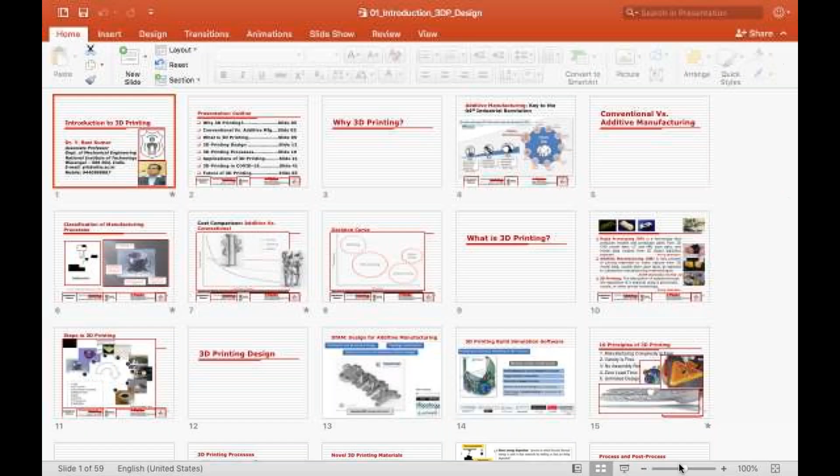Good afternoon, friends. So this talk is basically the introduction part of 3D printing.

What I have planned during this talk: why 3D printing, conventional versus additive manufacturing. The previous speaker has already thrown a good amount of light on conventional versus additive manufacturing, so I want to be as crisp as possible in that content. And what is 3D printing? 3D printing design - design is the main thing, like design for additive manufacturing is going to be the key in 3D printing. So I'm going to cover a glimpse of that.

Design for 3D printing, and 3D printing processes - we are going to have a separate session, so just a glimpse of 3D printing processes here. And of course, applications of 3D printing in general and specific to COVID-19, and finally the future direction of 3D printing. This is what I've planned for this session.

So then, why 3D printing? 3D printing is definitely a key element in Industry 4.0. Just as a recap: the first industrial revolution was way back in the 1780s to 1860s. That was basically mechanization - the first industrial revolution, where human muscle power was replaced with steam or water energy. That was Industry 1.0.

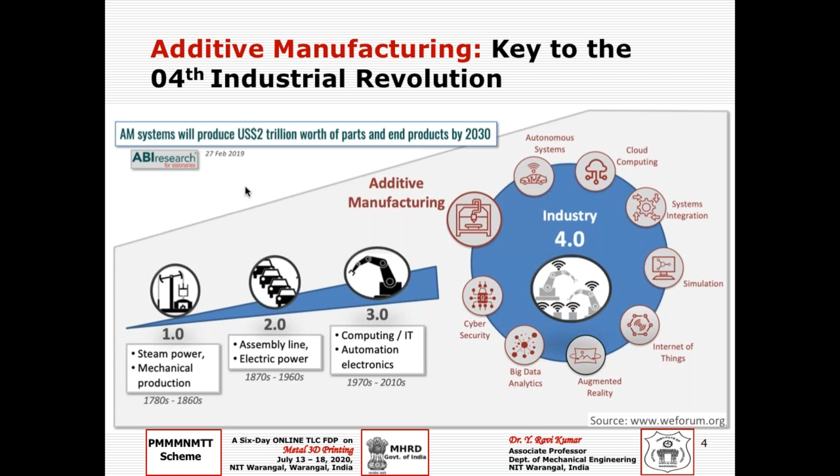So then let me give a brief classification. As we know, there are a lot of difficulties in subtractive manufacturing, especially when the complexity is more. If it is a simple component like this, you don't find much difference between additive and subtractive. More or less, the concern in subtractive is the scrap, the tool, and the jig or fixture.

But if you increase the complexity to a component like this cup, and you want to machine it, you have to consider several constraints. It's not that easy to machine this kind of component unless you have plans, tools, jigs or fixtures, and consider the number of axes the CNC machine has, and what kind of tool compensation radius is needed. A lot of things need to be searched, planned, and developed, and it will take a long way to do.

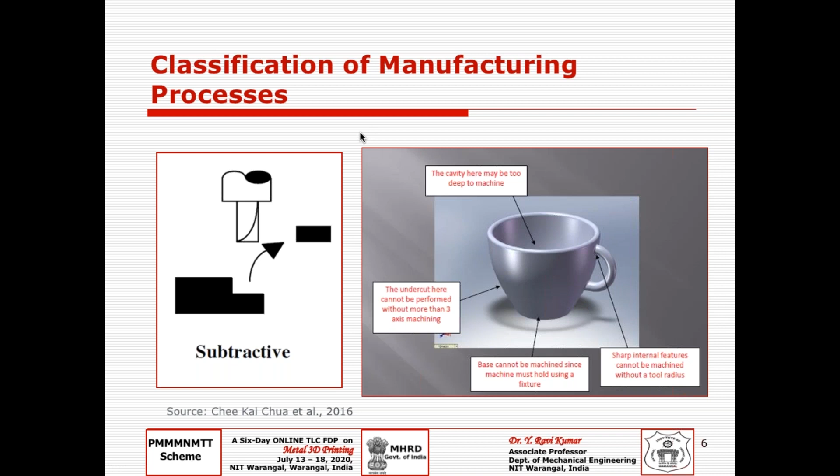But what 3D printing, or additive manufacturing, is going to offer is simplifying your life.

So no tool, no jig, no fixture, nothing. It is adding the material as per the demand. So that is the biggest advantage.

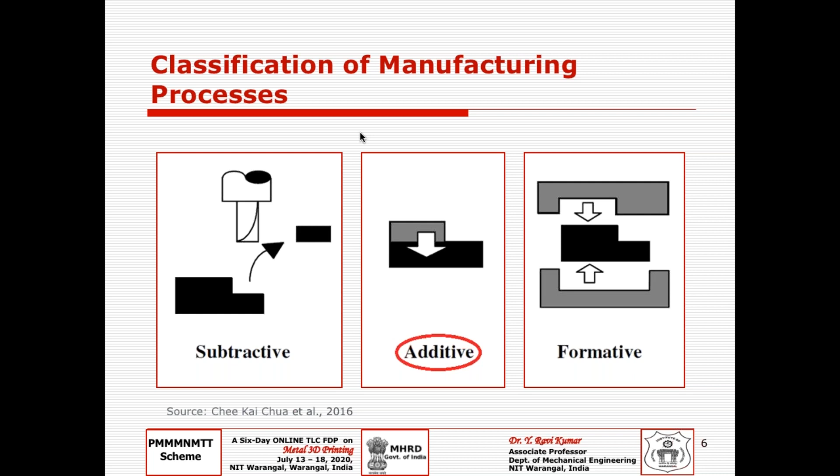Of course, we can compare it with other manufacturing or fabrication processes like formative, where we need to make a die for the anticipated shape. But here the biggest concern is how to make a die, how to design a die, how to fabricate a die, and again you have to look for subtractive manufacturing processes.

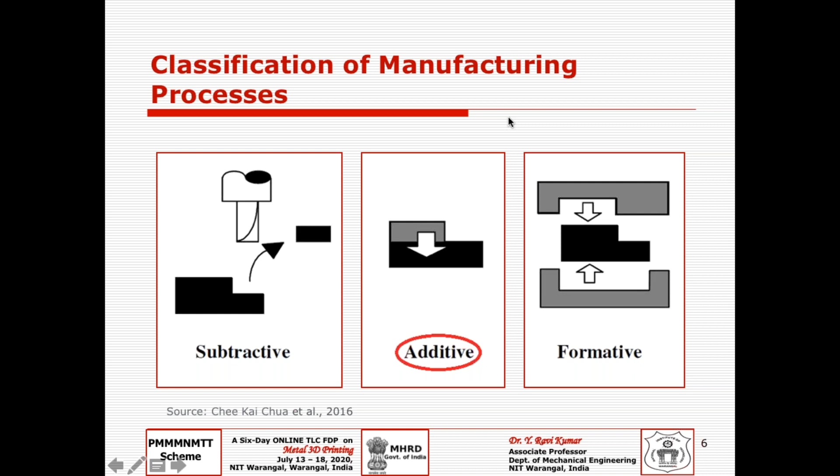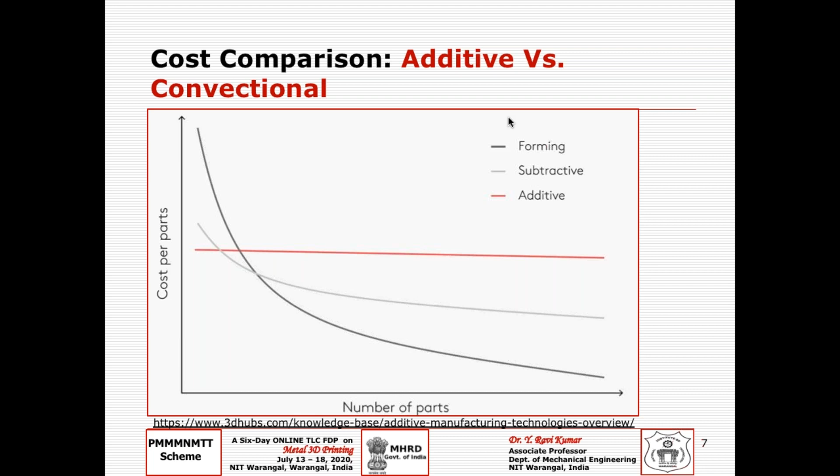And if the complexity is more, that is where additive manufacturing plays a vital role. And of course, the earlier speaker has touched on the cost comparison between additive and conventional manufacturing processes.

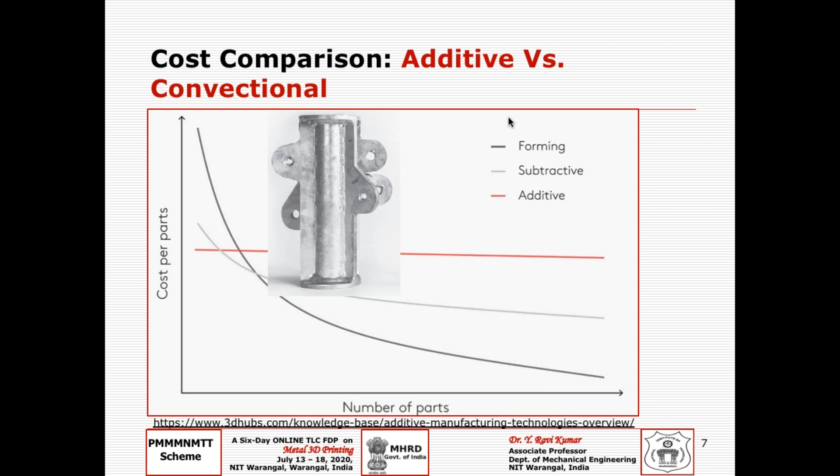So my central point here is complexity. Say if you have a component like this, it's very simple. If it's a CNC machine or a die tool making industry, they can make it very easily. But my design got changed.

My design is now organically designed, inspired from nature. Why? Because it's not a conventional cylinder or a conventional circle or elliptical shape, it has derived from nature, or it is organically designed.

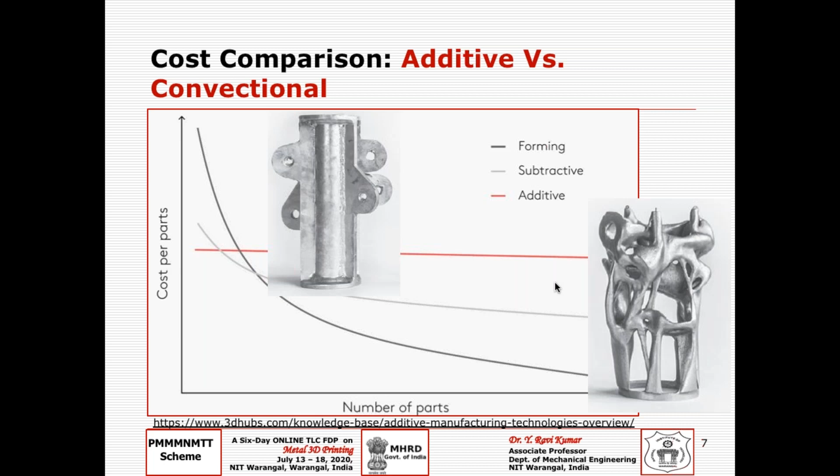So then what about the conventional manufacturing process, where will it go if this is the kind of design? This is where we need to focus, where the beauty of additive manufacturing or 3D printing comes into picture, as these kinds of designs are the breaking point or the beauty of 3D printing.

So if you see this plot between complexity and quantity, this is the extension of the previous slide. If your product complexity is very high and you're looking for relatively less quantity, definitely 3D printing fabrication technique is the best choice for you.

But if your design complexity is medium and you're looking for medium quantity, definitely CNC is the best option to choose. And if your complexity is very low and quantity is very high, definitely investment casting is the right choice for your application.

And if your complexity is medium but your quantity is high, better go with injection molding. So this is where you can take some decision on which process you want to adopt.

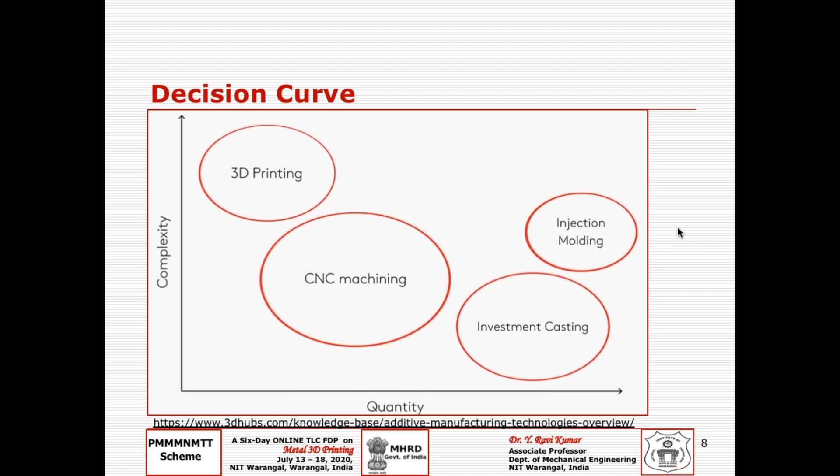So then what is 3D printing? Of course, nowadays it is not a new word to anybody, because it's simply the extension of 2D printing. We are living in a third generation of printing, we can put it that way.

Why? Because the journey started with prototyping, called rapid prototyping. Now slowly it has attracted manufacturers' attention - that's what we're talking about, additive manufacturing or 3D printing. It is an extension of two-dimensional printing. You name any term, but all these are synonyms.

So the kind of developments that have happened from the application of prototyping to manufacturing, or even mass production, people are looking at that now. And as we know, the technology's input is a digital model.

So either you derive it through a CAD modeling package, or from medical image processing software, or with CT MRI scan data, or even 3D digitizing systems or 3D scanning systems. Use any one of these interfaces to get the CAD model or digital model, and you're going to fabricate, or replicate the digital into physical form - that will be 3D printing, or additive manufacturing, whatever you call it.

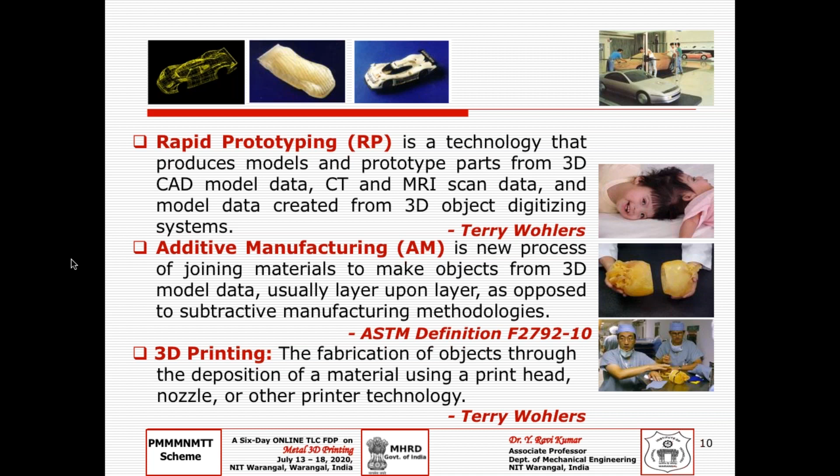Maybe rapid prototyping, but prototyping has exceeded the application maturity of this technology. Now it has elevated to manufacturing or tooling level.

So this is a fundamental slide - the various steps that are there in a 3D printing process. We have to start with the CAD model, or digitized data, or some means - you have to bring a digital model.

So what is your application? The major point we need to think about here is: you tell me your application, then I will tell you the material. Then accordingly we have to have a design for additive manufacturing, or design for 3D printing.

So it is not a conventional way of thinking. We need to change the mindset before we get into 3D printing. If we are using the same traditional mindset, you cannot exploit the power of 3D printing.

So your application is to have a cup of coffee. Go to any CAD modeling software. Nowadays CAD modeling softwares are open source, cloud based, or browser based, so you have a lot of developments. We don't need a big RAM or big setup anymore. Even a browser based software is available, which you'll practice in some lab sessions. Getting a digital model is as easy as that.

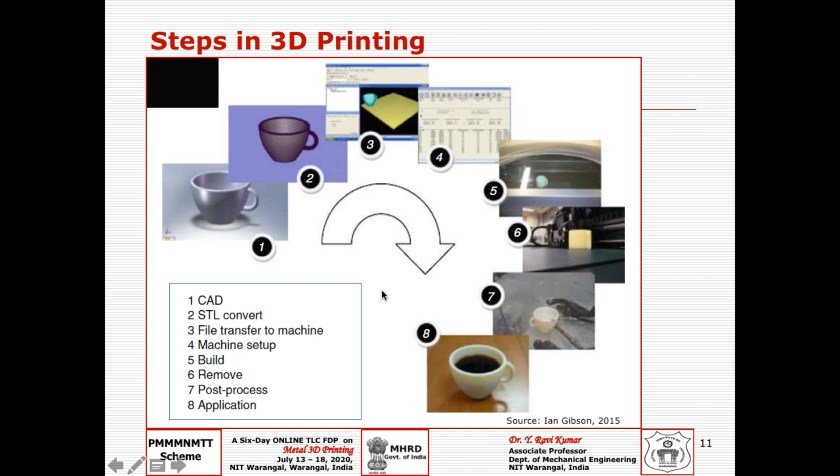So of course we will be talking about design. Why do we want to talk about design in 3D printing? Why is this word 'design' so important here? Why can't it just be conventional design? Is it not? That's what I am asking.

You have to change your mindset once you come to the 3D printing route. Why? Because with your traditional mindset, take this part for example - for traditional design, you have to start with a block of material. So your mindset is always about how to remove material from the block - the hole, the surface, or the curvature. But 3D printing is not that way. If your mindset stays in that way, you cannot judge your application or your 3D printing capability.

So then what kind of design, what kind of design content, or what kind of design should be in your mind once you come to the 3D printing route? We need to have a typical design thinking. Of course, we have a lot of design methodologies nowadays available with any CAD/CAM systems.

Maybe it started with parametric modeling. Now generative design is playing a vital role, and of course topology optimization - nowadays we use this word often. Why? Because you have such power. So modeling is not your goal; the goal is to print.

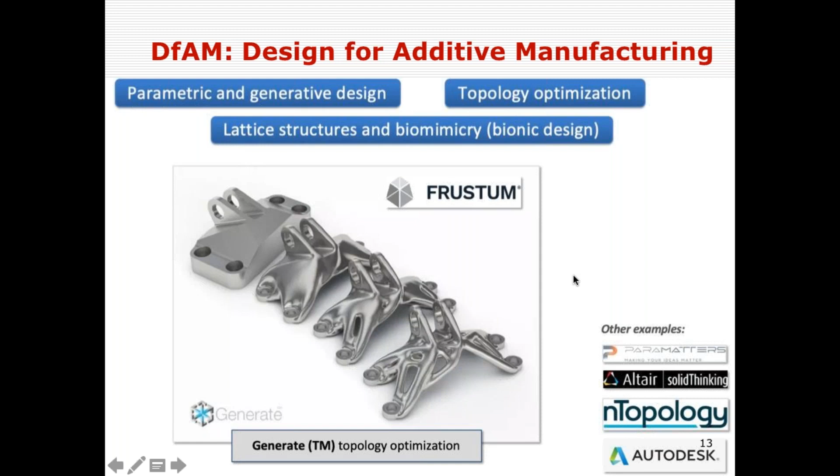So as Dilip, my earlier speaker, has rightly put, the simulation part of it - the 3DXpert is one which we have at NIT Warangal, and we are going to have a demo by 3D Systems on this 3DXpert software. So basically the idea here is to simulate before you manufacture.

Definitely it is not a new thing for CNC practice. You have been doing path verification simulations - for is any tool retracting, or is there tool collision with the workpiece. We used to do a lot of simulation in CNC. A similar thing we can do for 3D printing.

Of course, the material for 3D printing - if it is a polymer, you never care, because per kg it may be 1000 rupees or hardly 1200 rupees if it's a plastic like PLA or ABS. But if it is a metal like titanium, Inconel, aluminum, cobalt chrome, or other materials, those are very costly. So definitely we need to check for build failures or residual stresses.

But anyway, I have less time to talk here, so maybe you are going to have a live session on the 3DXpert demo by Lokesh. We can explore practically, on the screen, how supports can be simulated, how residual stresses can be minimized, and how we can compensate for all this. So you have not only 3DXpert, but other software too, and you can do all these simulations.

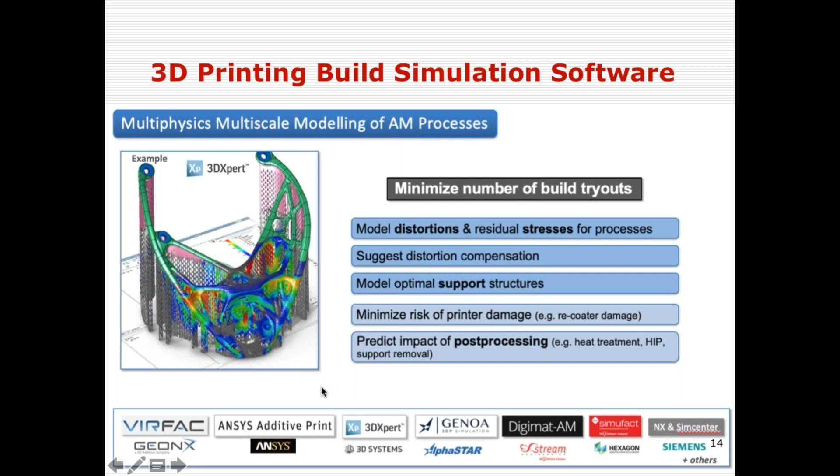And of course, I am going to put it in a wonderful way - the 10 mantras of 3D printing, or rather how it differs from traditional manufacturing practice. That is the intention of this slide - the 10 mantras of 3D printing. So the first mantra: of course, manufacturing complexity is free.

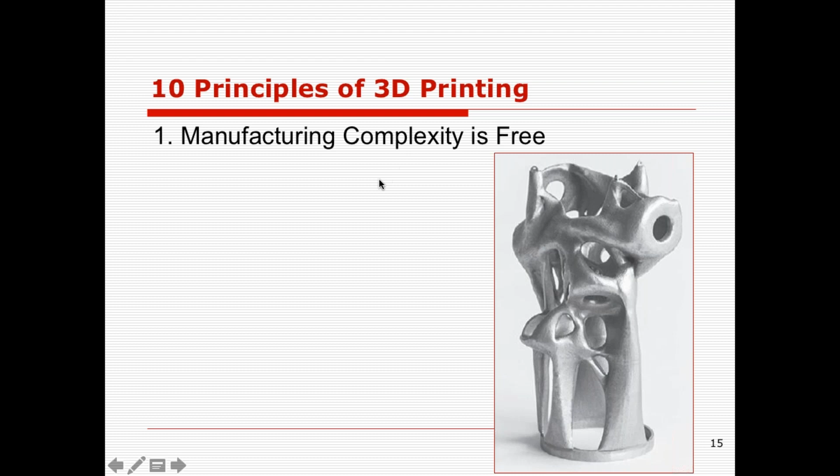For example, if you have a cylinder or similar, you don't find much difficulty or much effort in terms of number of steps or cost in case of 3D printing, in contrast with traditional machining or tool-making practice. So the manufacturing complexity you get is free of cost.

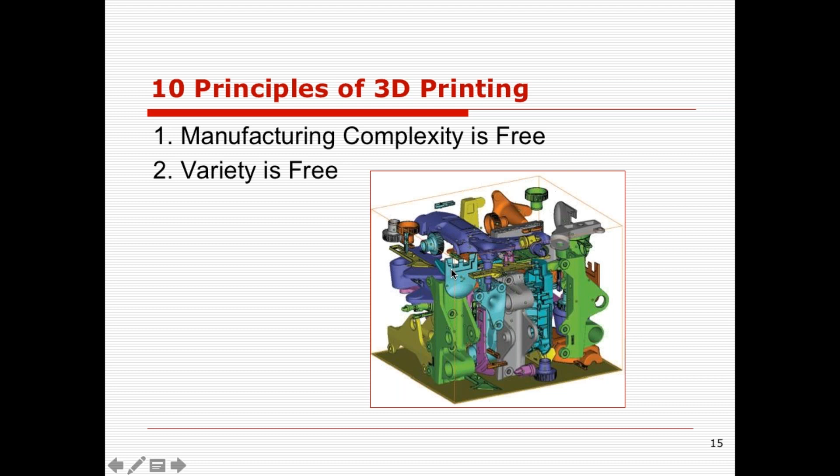Another one is variety is free. What do I mean by variety is free? I can make different geometries, different dimensions, different forms, all together in a single go. Otherwise, I should have planned tools for each component and designed jigs or fixtures if required. If it is a die-making industry, we have to design each and every die for each and every component. But in 3D printing, variety is free - you build different geometries, different dimensions, different forms all together in a single go. So variety is also free of cost here.

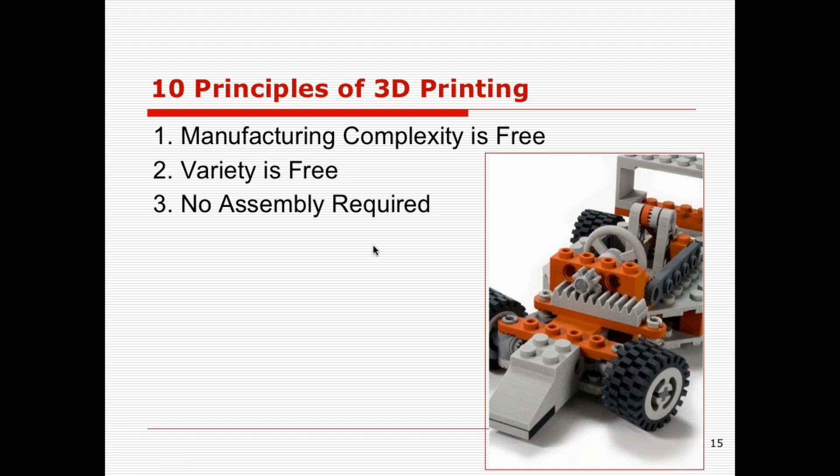And no assembly is required. As my previous speaker gave a wonderful practical example of how we can consolidate part count - nowadays it looks like a Lego type printed separately, but it's not that way; it has printed in a single go. So you have this kind of advantage - minimizing or making 100 parts into a single part, so no assembly is needed here. That is another mantra, or the beauty of it. And of course, zero lead time.

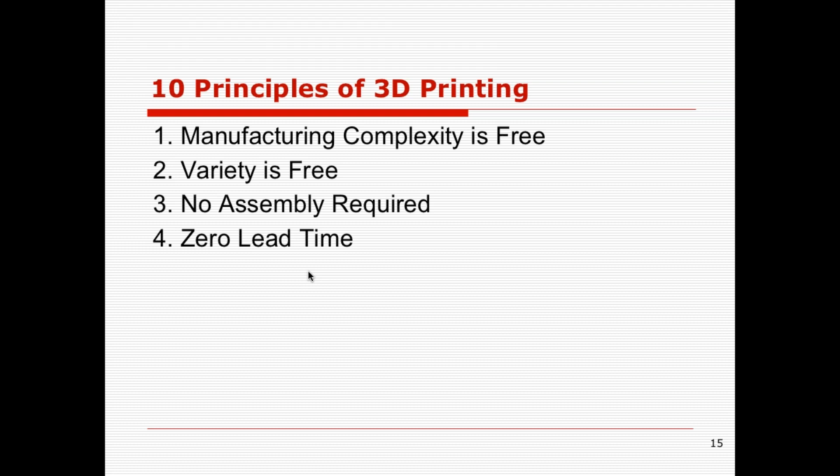So whenever you talk about supply chains, say for example if you want to make a component, in a traditional way, we need to identify who is going to supply your raw material, the block, who is going to supply the tools, and who is going to supply the designs. So you have a lot of supply chain around for traditional manufacturing. But if I want to 3D print it, I need only a 3D printer, that's it. Only a 3D printer and a software, and of course a drawing or blueprint. You don't require any other stuff that you'd be moving here and there with a lot of supply chain, as in traditional manufacturing practices. And because of that, the lead time may be zero, or you can reduce it drastically.

Unlimited design space, what do you mean by this? As the previous speaker touched on, designs are inspired from nature. So your manufacturing facility should not say that whatever you have designed is not possible to fabricate. You should not get such a reply from the manufacturer. You know what design for manufacturing is, right? But here you don't have any limit for the design space. So you can have unlimited design space here, as well as fabrication. You're going to print whatever you imagine.

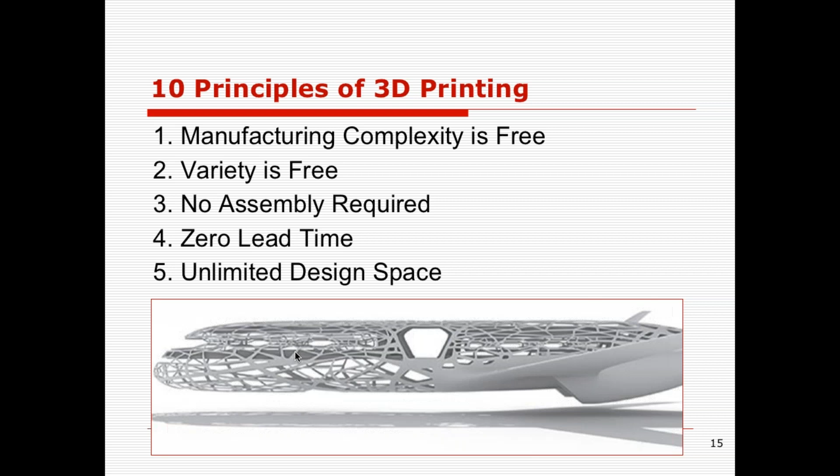And of course you have zero skill manufacturing. What do you mean by zero skill manufacturing? There may be a lot of debate about why. Because if I have a 3D printer at my home and a design shared through an online repository, or downloaded from some 3D printing community, I can print it from my bedroom. I don't need to go to a shop floor, or go to a tool maker to design a die. No, absolutely not. It doesn't require skilled manufacturing as contrasted with traditional tool making or machining.

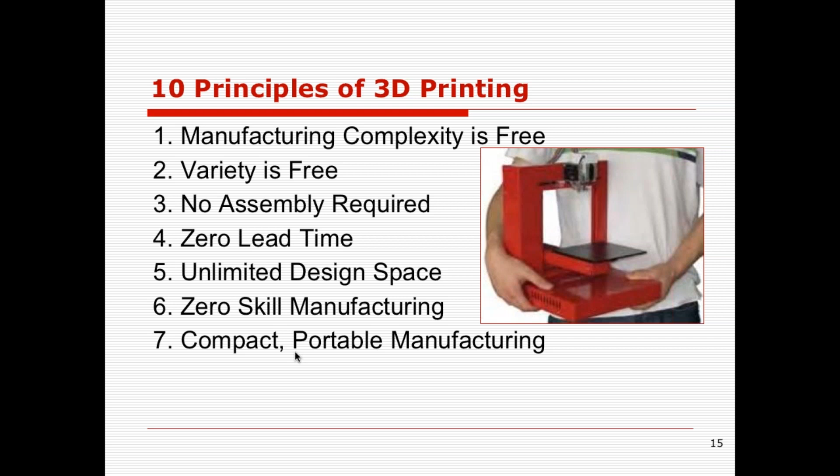And of course it's a very compact and portable manufacturing. What do you mean by this? If you take a conventional CNC machine, which is of a big size, you're finally going to make a small component on that. But here it's quite the contrast. Your 3D printers are very compact in nature, so it can print something sometimes even bigger than the size of the printer itself. So that is another advantage we get here.

And of course, less wastage as a by-product. Why? Because you are not removing material, you are adding material — literally zero waste.

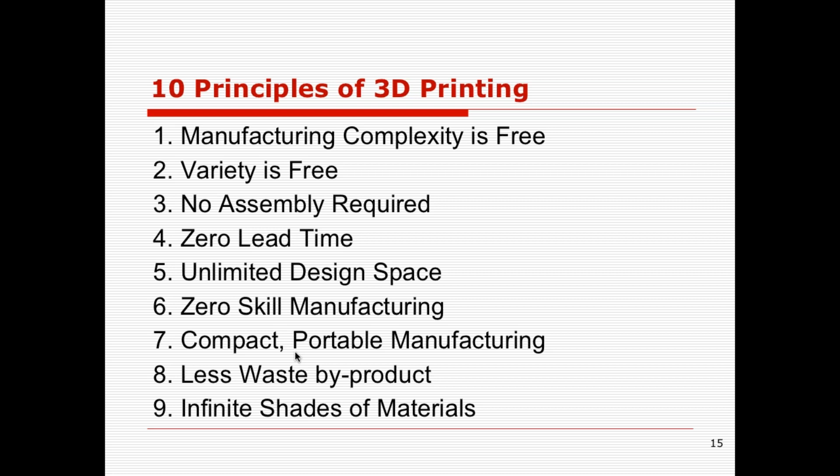And you have infinite shades of material. What do you mean by this? Otherwise you cannot do it conventionally. If you take a CNC machine, you can either machine a mild steel bar or titanium — it's a single material block you start with. Or similarly, with an injection molding die, you're going to get only plastic parts. You're not going to get a different material or multiple materials. So definitely 3D printing is opening up an opportunity to print different materials in a single go. You can have, say, a structural material and a circuitry, and print it in a single go. That is the infinite shades of material, which otherwise you cannot achieve traditionally.

And of course the last one, precise physical replication. What do you mean by this? It is nothing but the seamless integration of soft to hard — meaning you have digital data and a physical object, and vice versa. You have a physical object and you want to digitize it, so then you can play around with it, going from soft to hard or hard to soft. Of course, there must be 3D scanning technology also integrated with 3D printing.

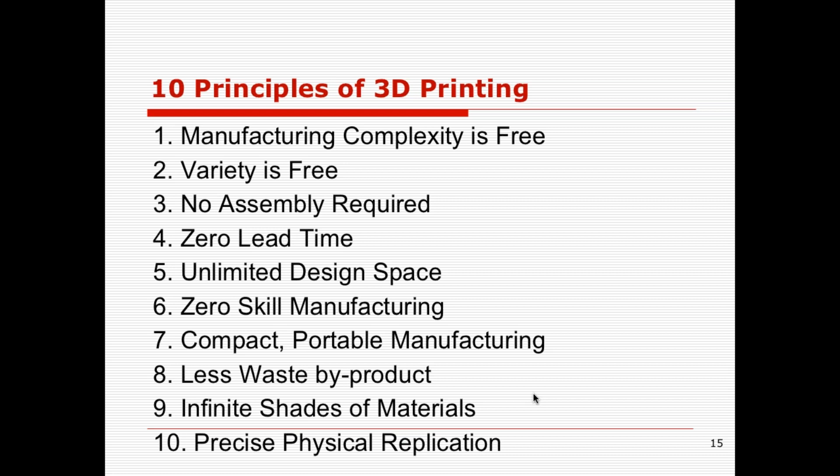So that's what these mantras of 3D printing are about, which we can discuss in terms of how it differs from a conventional process. Then we'll talk a bit about 3D printing processes, though we are not going to explore them fully — just a glimpse of 3D printing processes.

Of course, for any technology, material is key. The material you can print starts with polymer, you can print metal, you can print ceramics, you can print composites. And apart from this standard four classifications of materials, you have another advantage which otherwise you cannot get in traditional manufacturing.

You have a functional or electronic or shape memory material, or it can be a biological product or a food, or even it can be living cells. This is something you cannot do in a traditional way - these special kinds of materials, or special applications you cannot achieve conventionally.

Of course the raw material - we have other sessions to discuss how to make a powder and how to make a filament. So it can be in either of these forms: a powder, a filament, a sheet, or a liquid. Normally these are the forms you can find. We'll have exhaustive sessions on these 3D printing processes, so for the time being I'm skipping this.

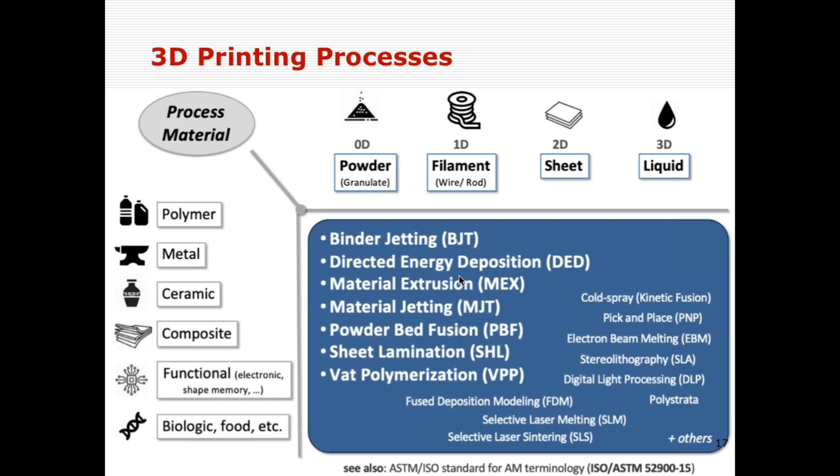So what are the advantages? As I already mentioned about material uniqueness and material choice, one advantage is multi-material objects, meaning you can grade the material.

Say I have alloy A and alloy B, so I can vary my composition - maybe vary alloy A and alloy B composition, and make an alloy C. It's totally varying compositions. So you have this wonderful opportunity which otherwise you cannot achieve conventionally.

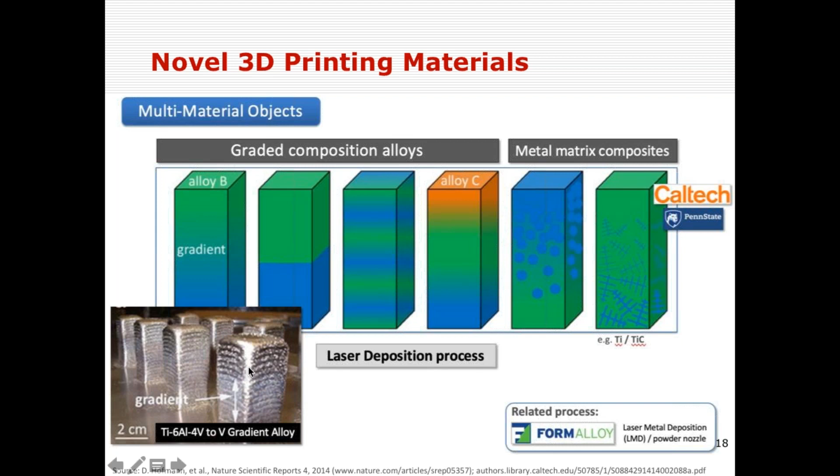And of course you have metal matrix composites also - it's coming up nowadays. And you have grading of vanadium here, titanium 6-4 vanadium, where you grade the vanadium across the length of your component. So you have this opportunity through 3D printing.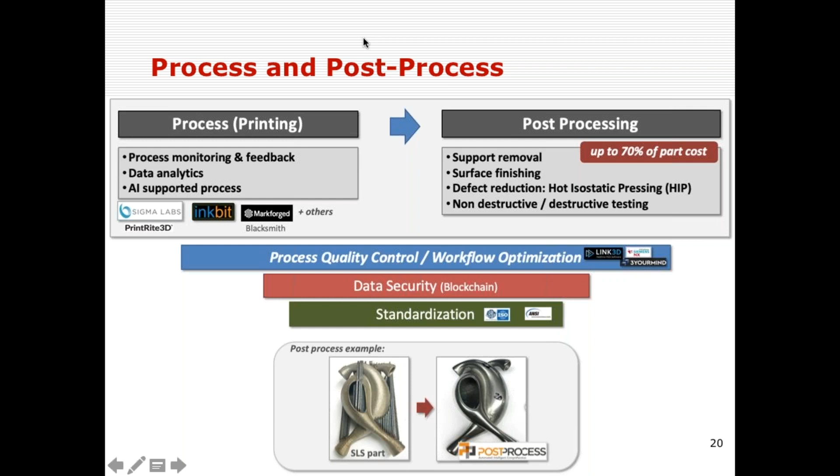Anyway, as I said, we have 7 processes in the upcoming lectures. So after the process, we should not forget post-processing. Post-processing plays a vital role here - why? Because we need a kind of... post-processing may be playing a vital role, especially if we are working with metal parts. Not only metal parts, but the application.

What is the application of your component? That will sometimes surprise you - sometimes it may go up to 70% of the part cost towards post-processing, of course not in all cases, but definitely it may go up. As we know, you may make only a near net shape, or you may get only anisotropic properties. So if you see the other side of the coin in 3D printing...

In order to fill that gap, you must have some post-processing techniques. Support material also plays a vital role - that may be tackled a bit through design for additive manufacturing, which you can handle using simulation software.

Surface finishing is another area where we need to improve, purely depending on the application. And of course, defect reduction - sometimes you may go with the hipping process, and sometimes you test non-destructively or destructively. So you have all this post-processing stuff.

Apart from post-processing, even nowadays you are talking about Industry 4.0. Can you integrate the Industry 4.0 concept like smart manufacturing, artificial intelligence, right? Definitely you have a lot of scope. People are working on research, looking for research. Definitely 3D printing will open up doors for a lot of research scope.

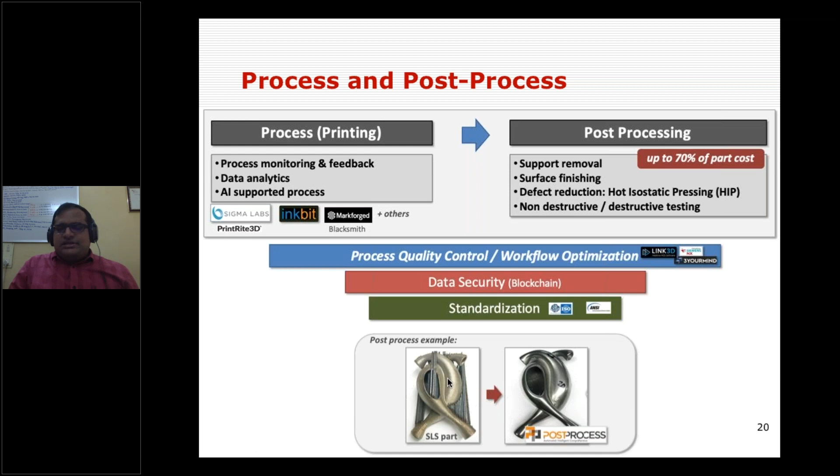In connection with this, maybe 70% of cost. So how do you remove metal-to-metal supports? If it's a polymer, it's altogether a different ball game, but with metal, how do you remove the supports? How do you improve the finish, how do you improve the microstructural or metallurgical properties? That is the thing we need to focus on.

So then let me focus on the application part. I've divided applications into two groups - one is general application, which I'll go through quickly because my earlier speaker made my life easy by talking a lot about industrial case studies. So let me quickly scan the applications - it may be interesting to you too.

So you have applications right from prototyping - that's the first generation we're talking about - replacement parts, conceptual models, functional prototypes, end usage parts. That's where you're looking, because the technology matured - not just conceptual models or prototypes, but end usage parts. And of course tooling, jigs, fixtures, visual aids, branding, promotions, molds, castings - plenty of scope for 3D printing applications.

Right from prototyping - aerospace, automobile, medical, military, jewelry, industry, construction, sports, clothing, electronics. As we discussed previously, the 10 principles of 3D printing give you a unique advantage. If you take each and every community or industry, there's a unique advantage once you come to the 3D printing route. I don't have much time to explain this, but you're going to exploit the power of 3D printing through all these applications, right from prototyping to end usage parts.

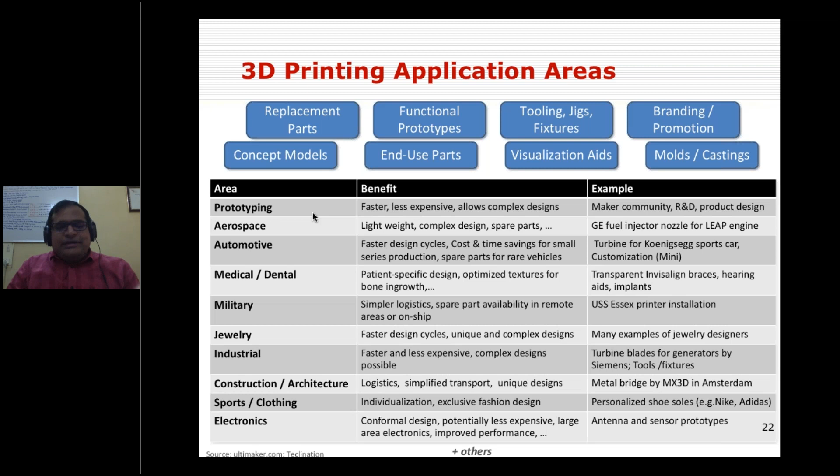And of course, it gives a game-changing solution. As we know, for teeth aligners normally people use a kind of wire, and it will hurt you - it may give a lot of pain to the patient and look awkward. But if you have a 3D printed aligner, hardly anyone can notice it, and you don't have the problem of the wire hurting the teeth. So nowadays it's becoming digital dentistry.

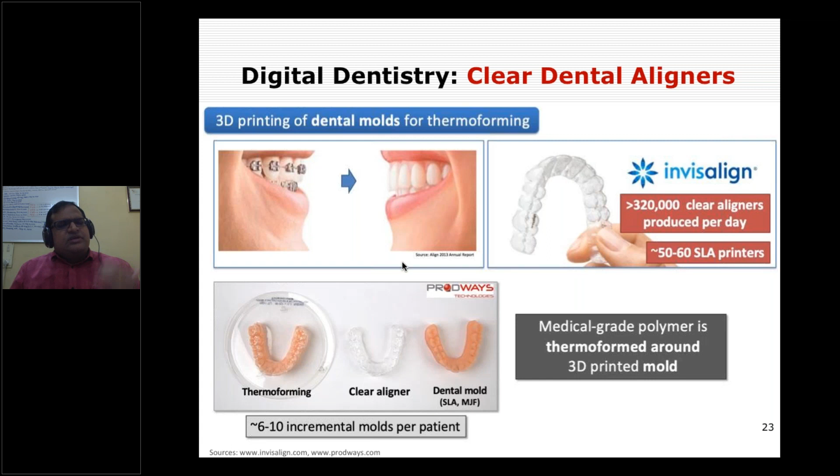No more taking dentures or impressions from the mouth—it's now digital dentistry. Of course, customization, and that too mass customization, especially with hearing aids. Normally hearing aids come in standard sizes, but here you have an opportunity to customize the hearing aid for your ear canal size. You just let it get your ear scanned and let it be printed.

A lot of the supply chain also gets compressed. You don't need to keep calling the patient in again and again for fitting. Once you scan it, your job is done—you can print it, courier it, and let him fit it himself, exactly to his size.

This need not only be medical—it can be a consumer good like shoes, or spectacles, or whatnot. So you have a huge scope, especially in a hugely populated country like India. Once you come up with the right business model or idea, you can exploit a lot of opportunity, because 3D printing doesn't require huge investment to start your business.

A conventional CNC machine may cost 10 or 20 lakhs, but a 3D printer may cost just 1 lakh, and you'll get a reasonable quality product through ABS or PLA. So you can invest 1 lakh in printing and maybe 50,000 in scanning—hardly 2 lakhs to start your business—using open source software for designing.

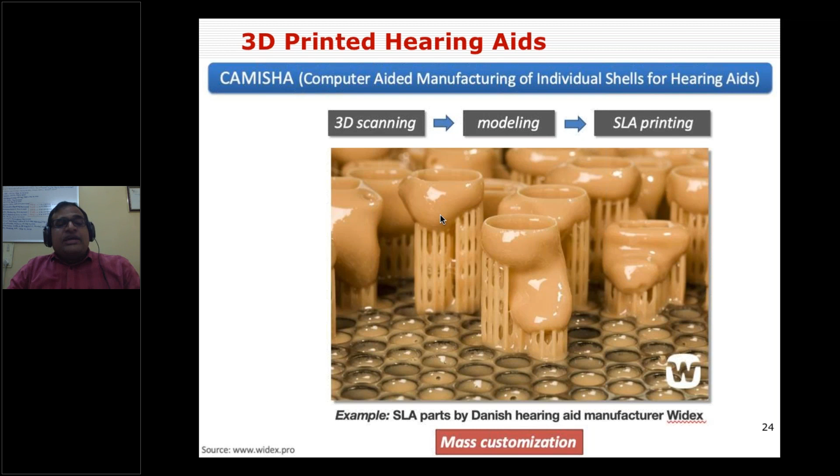So you can wonderfully start your business and look for opportunities where you have a lot of mass customization applications around you.

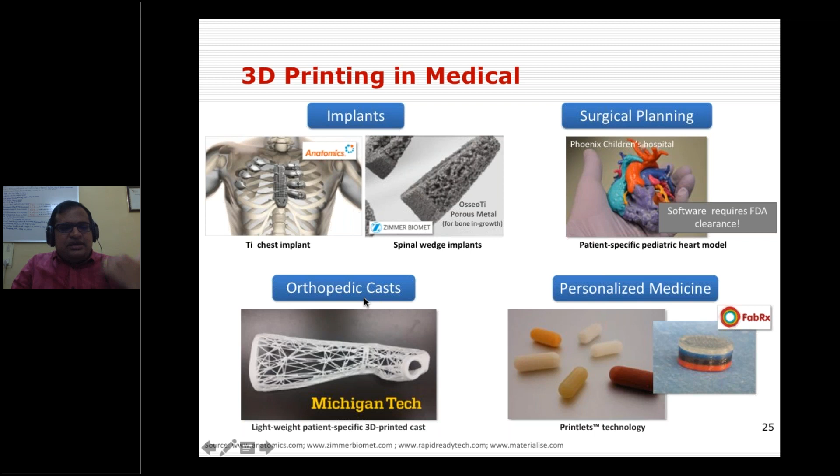Implants are another area where 3D printing can mimic the bone, mimic nature, mimic the anatomy, enabling customization and personalization. That is the biggest advantage in medical applications—whether for implantation, surgical planning, orthopedic casts, or personalized medicine, there's huge scope to work on this.

Aviation is another area where there's an ever-present quest to reduce payload—that's the crux of the aviation industry. How do you minimize the weight of the aircraft, in cabin parts or underhood parts, everywhere? That's where 3D printing comes to the rescue. This is why GE, Boeing, Airbus and others are looking around metal 3D printing especially.

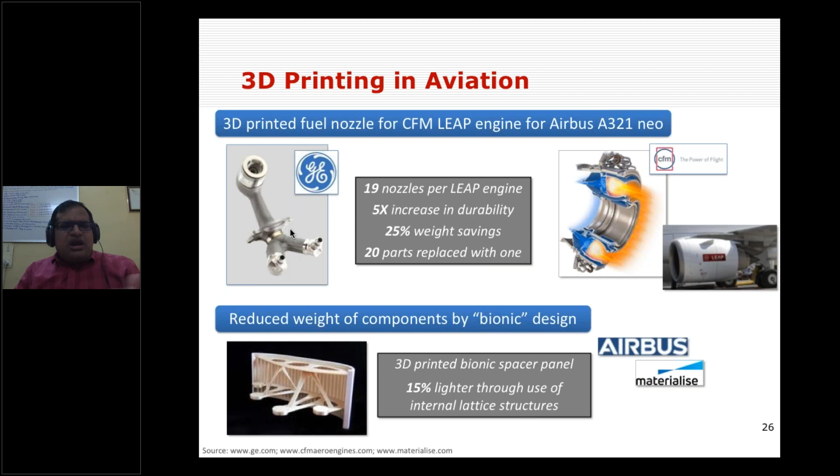We need to reduce weight, and reducing weight gives a double benefit: one is production cost, the other is mileage. You save a lot of fuel once you reduce the payload of the aircraft.

Another aerospace application is consolidating or integrating parts—like a fuel injector and a thrust chamber can be integrated together with a lattice structure for heat carrying capacity. The idea is to exchange heat, and that design is derived from nature—the lattice structure—giving you a wonderful performance improvement over conventional systems.

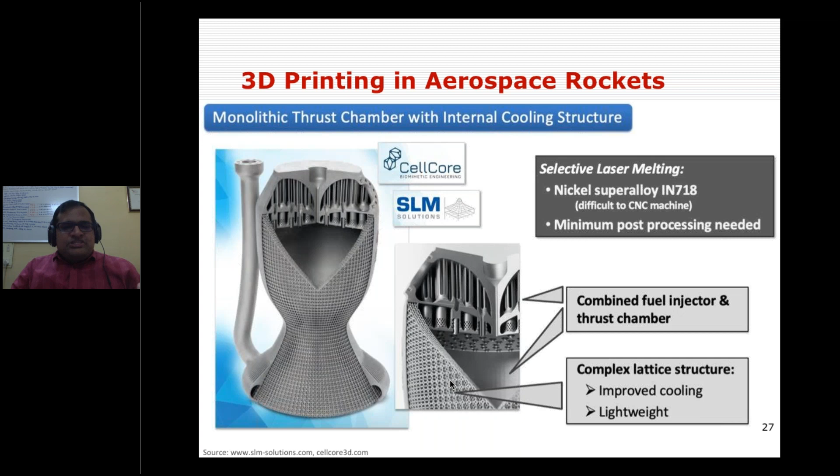The earlier speaker also touched upon heat exchanger parts, so you know the advantage of printing heat exchangers through 3D printing.

Jewelry is another big business area in India—we Indians are very fond of gold. Even if it's 50,000 rupees, we never bother; we keep buying gold. So Indians are among the biggest users of 3D printing in India, especially the jewelry industry.

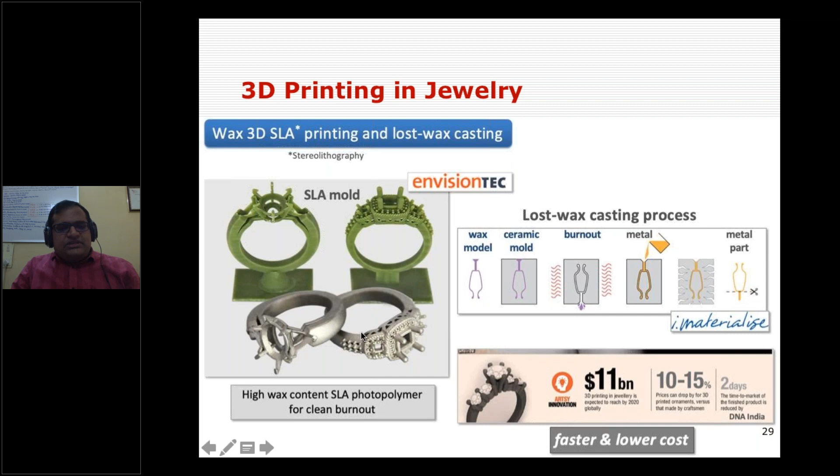The jewelry industry uses investment casting—you can make wax patterns or sacrificial patterns using 3D printing, and further print your jewelry items. That's where jewelry is a very good application.

And of course automobiles—recently I came across articles saying people are able to print entire engines, maybe a Formula One car engine or gearbox. So customization is playing a vital role across all these objects.

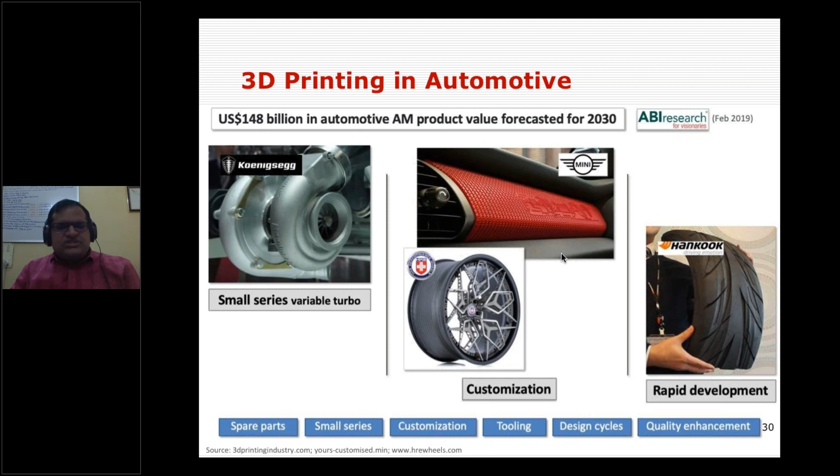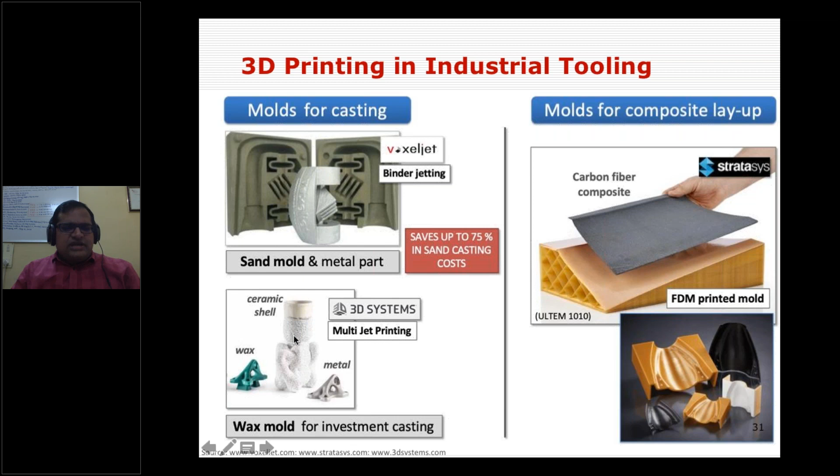Maybe some of the luxury companies which I mentioned, but you have a lot of applications where automobile people are looking at 3D printing for making dies, tools or fixtures. So of course, you have a lot of scope to work on molds and metal castings. You can make sand, core sand, and further metal and wax, and then ceramic mold and metal. So in this way, you can have a lot of molds made through this 3D printing technology.

Another advantage is part consolidation. So 100 parts are consolidated into a single part. That is the advantage, where you get 95% weight reduction, 20% reduction in production cost, and 75% reduction in non-recurring cost. This is something you otherwise cannot achieve in a conventional way.

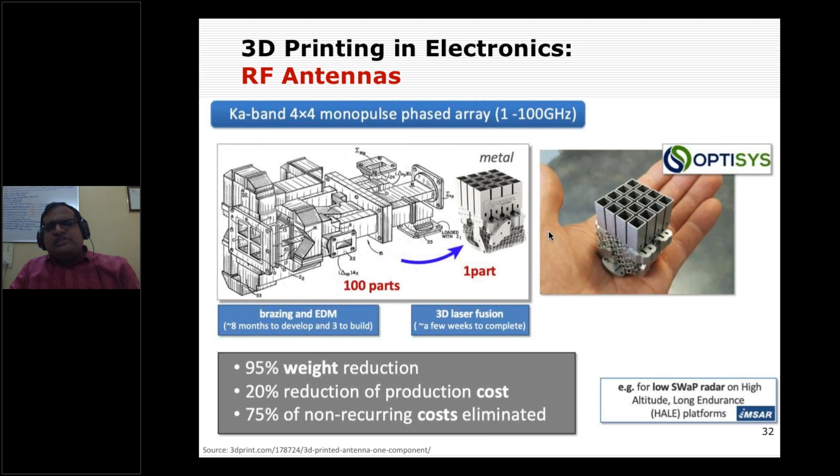So with a conventional design mindset, you come out with a 3D printing mindset, and then design accordingly. You consolidate, or you take inspiration for the design from nature or elsewhere. You can do wonderful things in 3D printing, but unless you have a design mindset, remember this.

Nowadays we see a lot of articles saying that we can print lenses. Yes, people are printing lenses. You know the advantage of printing lenses through 3D printing - it doesn't require any polishing. Polishing is a major challenge for traditional lens makers. So definitely you can exploit such kind of advantage here.

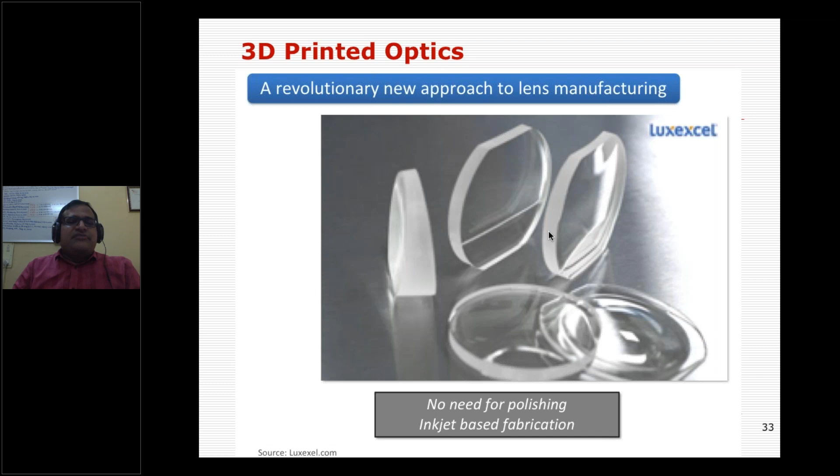And of course, as I mentioned, personalization and customization - you can customize for your pressure points. So you can design your customized shoe sole and print it. It can also be used in the fashion industry where you can print customized dresses.

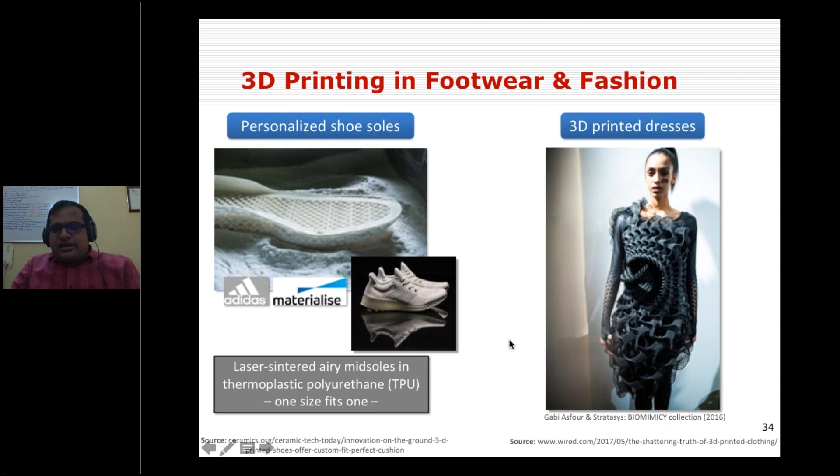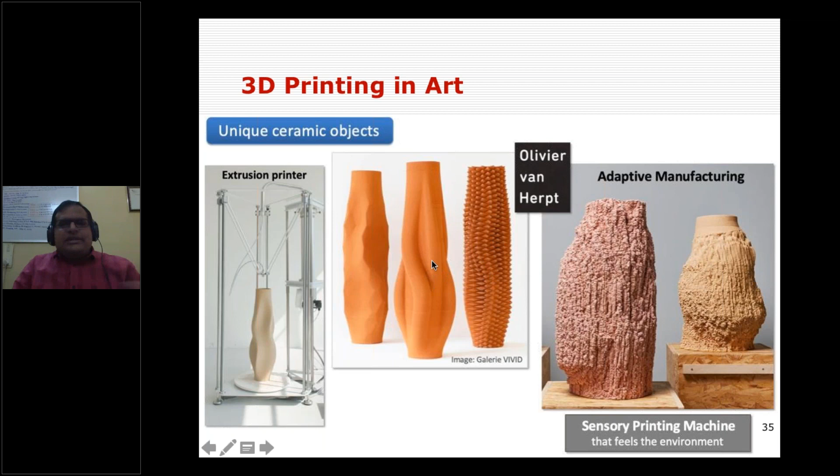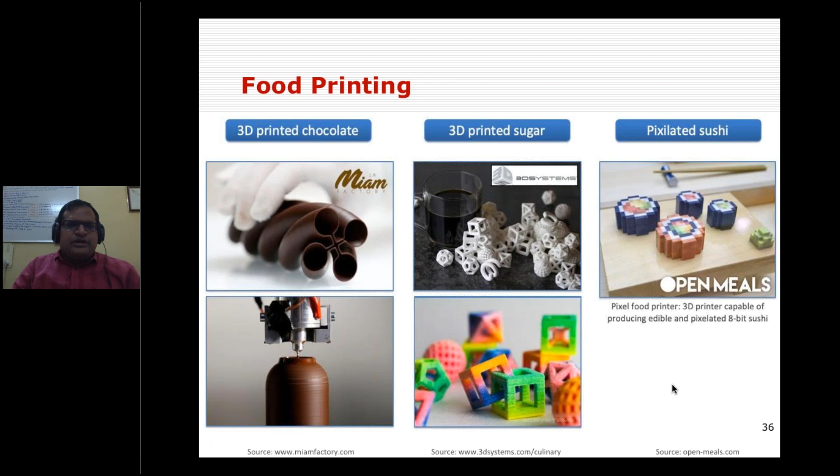So let me mention some futuristic applications for 3D printing. Of course, bioprinting or organ printing is going to be an emerging trend in medical applications of 3D printing. The earlier speaker has already clarified that, as per his thought, it may be 10 years to replace complex organs, so we won't need to look for a donor.

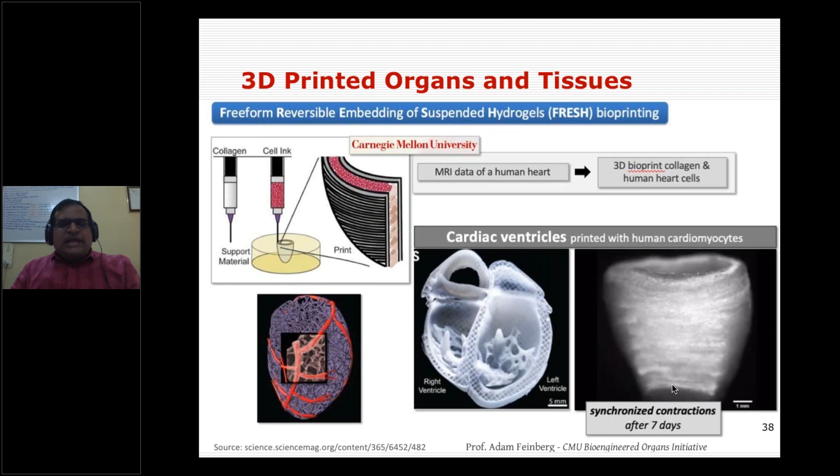They may take your own living cells, add nutrients, put it in an incubator, and test it in a bioreactor, then inject it into your own body - cultivated from your own cells, living cells or stem cells. That is the beauty, or the futuristic application, of 3D printing in medical applications.

So you have wonderful products, and of course some futuristic applications where you can integrate robotics into the 3D printing scenario. Nanyang University is developing these kinds of structures built from robots, which gives the advantage of robotics with more degrees of freedom than a conventional 3D printer. As of now, you have only 3-dimensional, 3-axis freedom, or for some processes like DED, you may have 4-axis or 5-axis freedom, but not more than that. But if you're using a robotic arm, you have more degrees of freedom.

And people are also able to integrate unmanned aerial vehicles - so you can crawl, you can swim it, you can fly it.

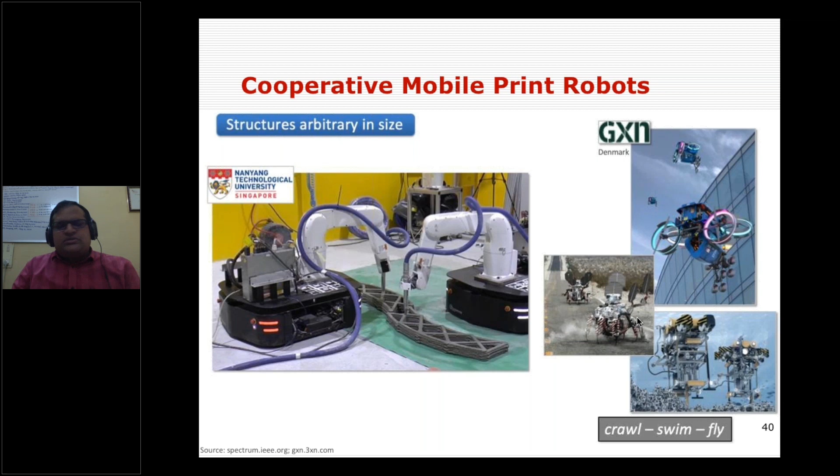So then let me come to the last part of the presentation, about how this is helpful for COVID-19 cases. As I already mentioned, you have a lot of repositories or digital communities where you can download designs free of cost without designing by yourself.

3D printing will allow you to customize as per your size. You can customize your safety goggles, or shields, or similar stuff, with a lot of customization possible. It doesn't require any manufacturing skill, only the design or blueprint, which may already be available through a 3D printing community or an online repository like Thingiverse or GrabCAD. Otherwise you can customize as per your requirement.

So then there is no supply chain at all. You need only a 3D printer and the design. If you have a 3D printer at your home, this is quite fit for the lockdown period or the COVID-19 pandemic, where you cannot move from home. You can comfortably have a 3D printer at home, download the design through the web, and print it comfortably from your bedroom. So there's no supply chain management needed, unlike otherwise.

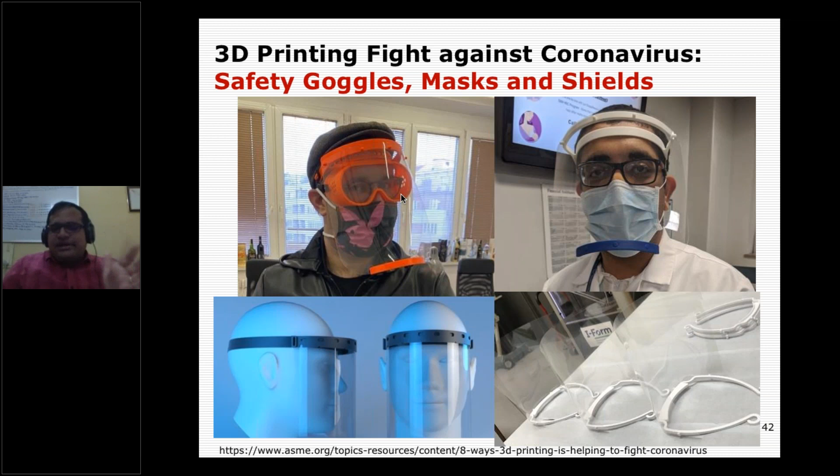And of course in India also there are people working in the 3D printing community to design indigenous stopgap masks, or other ventilator devices, so you have a wonderful opportunity. Otherwise, we can put it this way: 3D printing is a COVID hero.

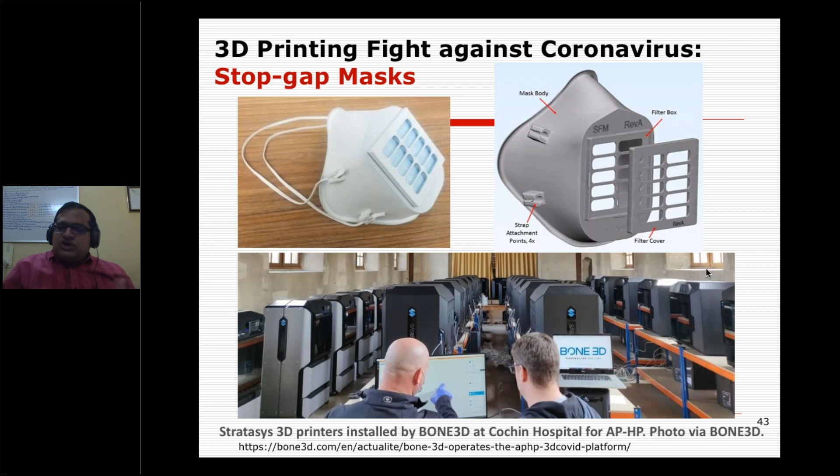So it will take a lot of challenges, of course, a life-saving kind of thing. Normally, as we know, ventilators are badly needed, but people are looking for alternatives, maybe PEEP valves, or respirators, or other stuff, where we are going to totally replace the ventilator, but not for all patients, only for people who badly need it, definitely a ventilator should be supplied. But not all people—as per the survey, only 5 to 10% of people may require ventilators, but people who don't require ventilators may still be at a kind of criticality with the virus.

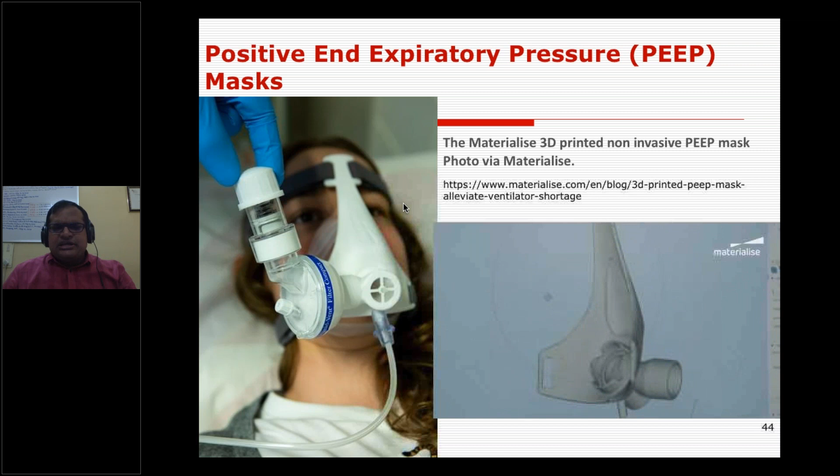So definitely 3D printing will help you print and customize devices like PEEP masks. This is from the Materialise community, where they share these designs, and then you can print them and connect them through HEPA filters—this is the oxygen supply. So you have this oxygen supply, and through these filters, finally it comes to the patient's mouth. This is where you can 3D print these kind of things, which is very crucial in COVID situations.

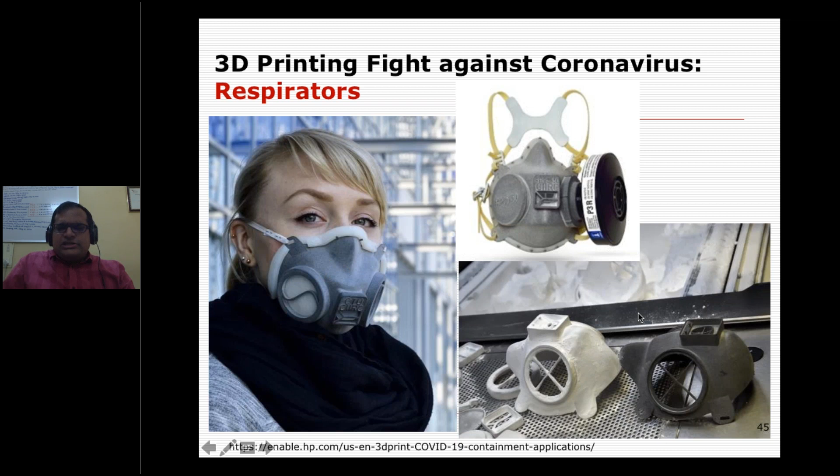And of course the respirators—this is from HP and Redington in India, they have a collaboration, and in India also HP has extended their hands, so you can visit the HP website and customize the respirators, you can do a lot of stuff. This is 3D printed through HP's multi-jet fusion technology.

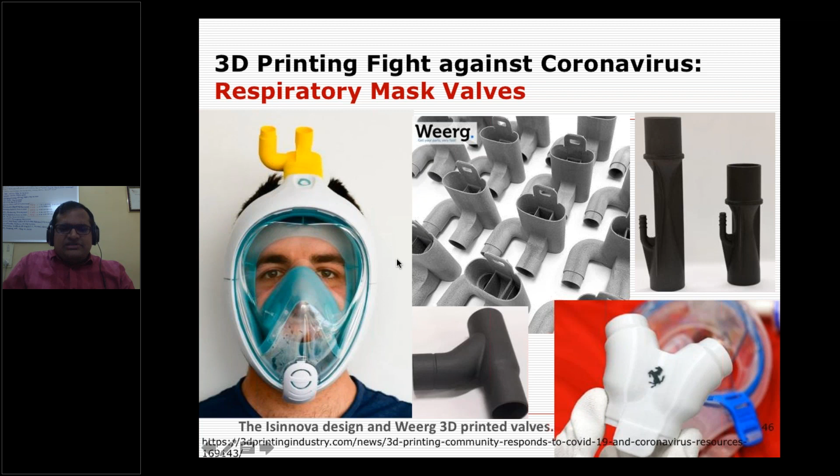And of course you have a respiratory mask kind of valve, where the oxygen will come through a battery operated blower, and the business of 3D printing is to print this kind of mask or valve for these applications. And of course people are reverse engineering these kind of oxygen valves. Why?

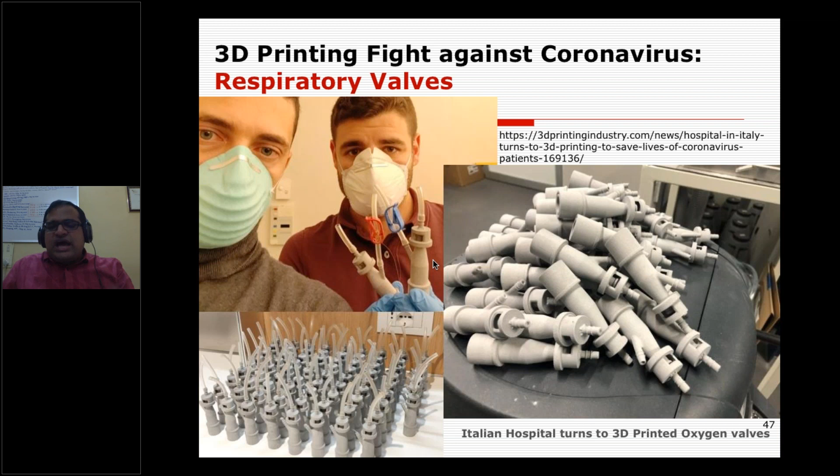Oxygen valves are badly needed, say 200 to 300 per day. That is the kind of requirement, so there won't be time to ask the supplier, can you supply 200 or 300 per day? And we don't reuse these valves, so we need one patient, one valve. That is the challenge, so people are even reverse engineering or re-engineering it.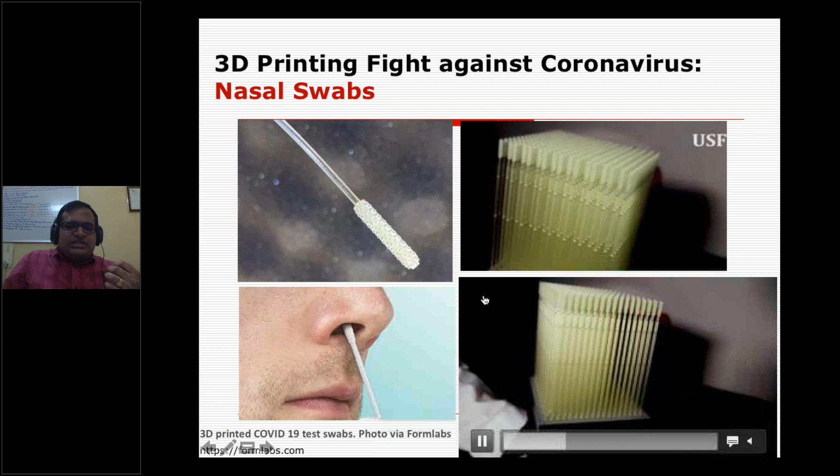We have a lot of tests pending in India also, where we need some kind of rapid test. For that we have nasal swabs to 3D print in mass production, maybe in a single go, 200 or 300 in a single build, maybe in 10 or 20 hours you could make 300 or 400 nasal swabs this way. Then the designs will be shared to the hospital community, and they can even have 3D printers in the hospitals to print and use for diagnostic purposes.

Materialise has come out with designs, and nowadays you can find a lot of this kind of thing on Amazon also, which you can basically 3D print once you have the designs. It may even be costing you less than what Amazon people are selling, because your 3D printing spool may not be much costly, PLA or ABS if you use. For this case, you are not going to use it for frontline applications of the hospital staff, so you can very well use PLA or ABS.

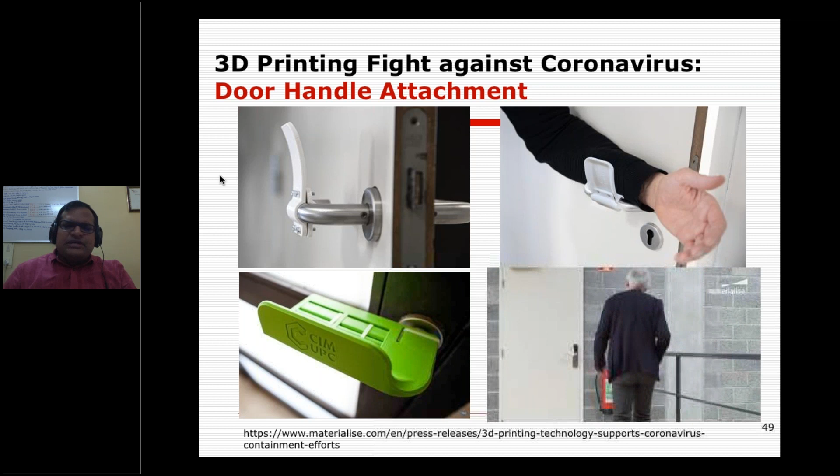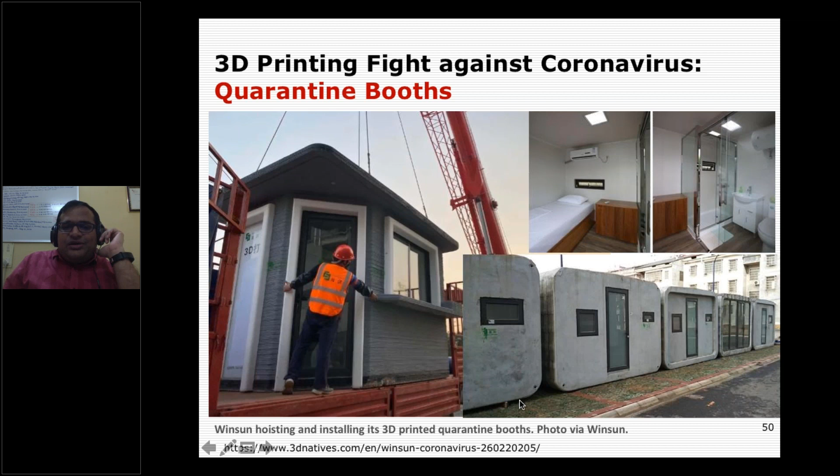So then we have such kind of applications. And of course you have quarantine booths also, which you can 3D print, like in this kind of pandemic where people are printing these kinds of booths with electric supply and water supply. So we can use 3D printing for construction or disaster management like this.

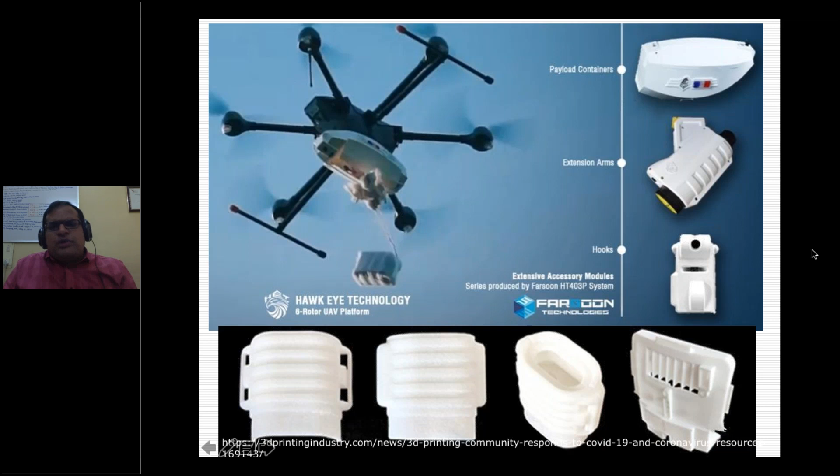And of course unmanned aerial vehicles, again payload like in aerospace, similar principle works here, how to minimize your payload. And your 3D printed parts, you can vary the fill densities, mimic lattice structures, bionic designs, so we can almost reduce the weight of the unmanned vehicle, either towards battery assembly or electronic assembly. We can scoop out this material and reduce a lot of weight.

And of course ventilators - people are looking for a substitute or alternative for ventilators. One more idea is, normally the ventilator will be supplied one-to-one, one ventilator, one patient. But how do you scale a single ventilator to accommodate a minimum of 2 and a maximum of 4 COVID patients who require ventilators? That is the idea where you can find a lot of designs available.

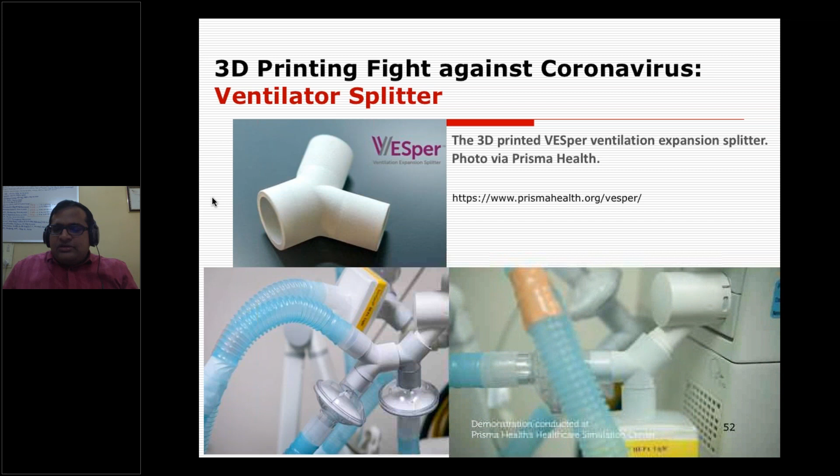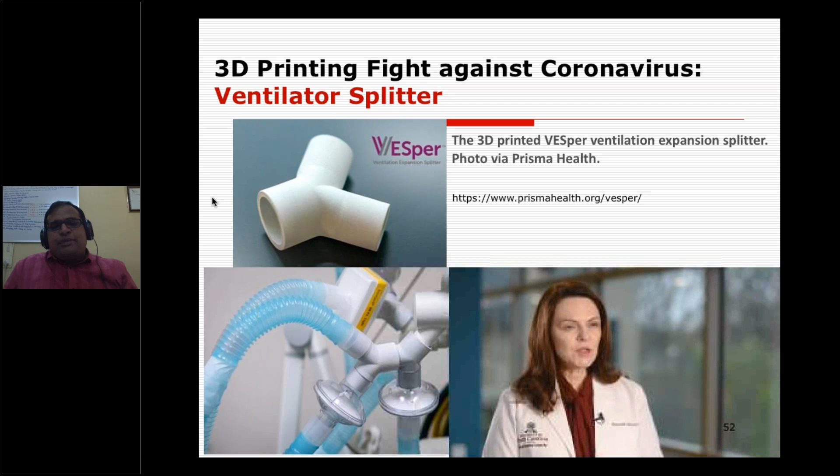Like this is a VESper, a company from Prisma Health, where they have designed this, and they don't use conventional PLA or domestic kind of material - it needs to be FDA approved. Why? Because you check repeatedly what is your application, whether it's going for frontline people or simply for the common public - where is the product going, what is the application of it? Definitely it's the frontline, so we have to take approvals from FDA, or appropriate clearances should be taken from the appropriate authorities to use this for a critical ventilator, either splitter or any composite component.

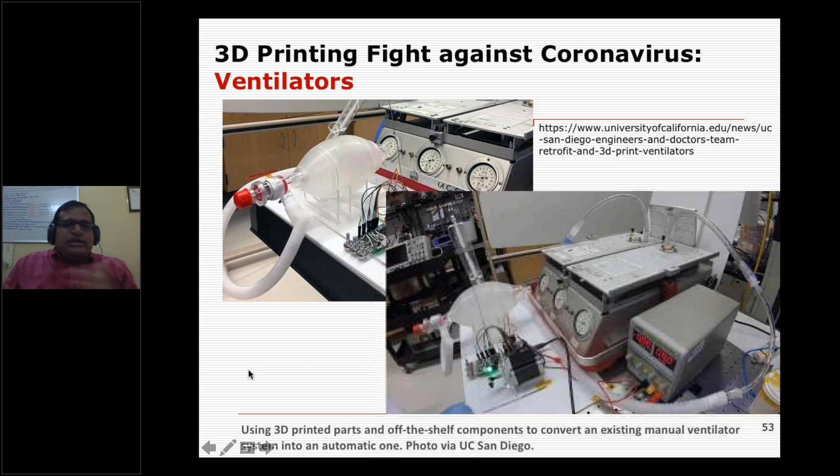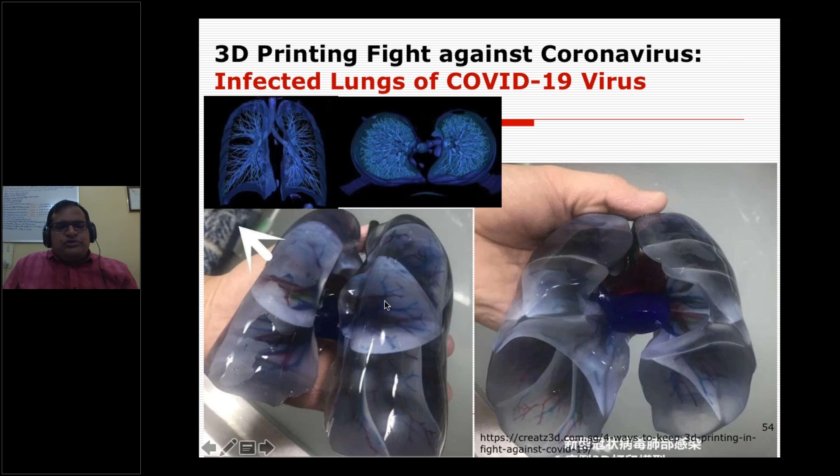So this is one other case study, where I don't have much time to discuss, let me quickly conclude my session. People are looking to convert manual into automated ventilators through 3D printing. And we can beautifully print a kind of COVID infected patient's lungs, how these lungs are infected, so we can even see how beautifully, with the vascular structures also, it got printed, and see how much infection the COVID patient is having. So in contrast with an MRI or CT scan, you can beautifully print them this way. What could be the future?

Let me conclude with these 2 slides. What could be the future? Of course the future is going to be one dimension ahead, maybe 4D printing. So what do you mean by 4D printing? 4D printing is basically - you may have 3D printed structures, and 3D printed structures are normally static structures, but you are going to make dynamic structures through 4D printing.

How is it possible? Definitely the material is the key. You may use shape memory alloys or smart materials, and further you need some kind of stimuli to get the shape deformed, transforming the static structure into a dynamic structure. As per the situation or environment, it's going to adapt to the environmental conditions.

So if it is a heart valve, if somebody is getting a heart stroke, the smart material or the 4D printed valve implanted into the heart of a patient having a massive heart stroke won't allow the blood to block. It may allow the blood to flow. So that is the life-saving application.

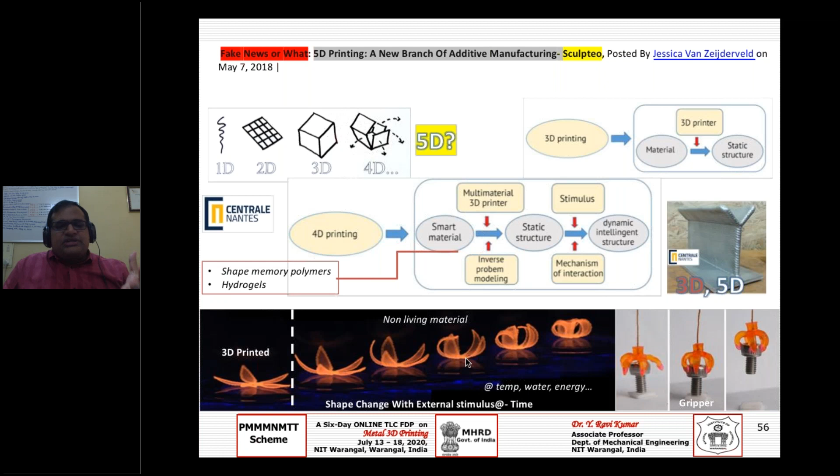Definitely, very soon we can see these kinds of 4D printed components. Of course, it's going to be a kind of micro-nano sized 3D printing parts also which we are going to experience, and it can be 3D printed batteries, or voxel based printing. It's no more going to be layer based.

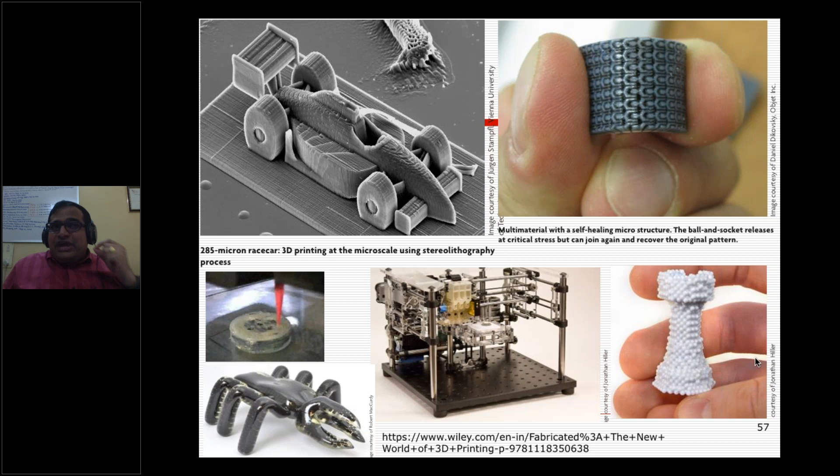This is only a prediction. Why should it be 2-dimensional, 2.5D layers stacked together? Why can't it be a voxel? These voxels can be in terabyte size, or mega, giga, or tera per second. Can you print them at that speed? That is going to be the future.

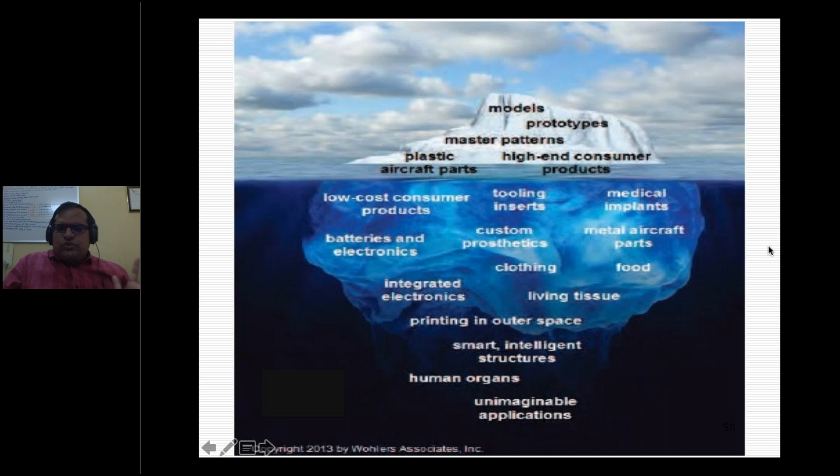Let me conclude. Whatever applications we are seeing so far, it's just the tip of the iceberg. You have a lot of applications to come. Let me conclude this session here. I might have exceeded the time also, sorry for that.

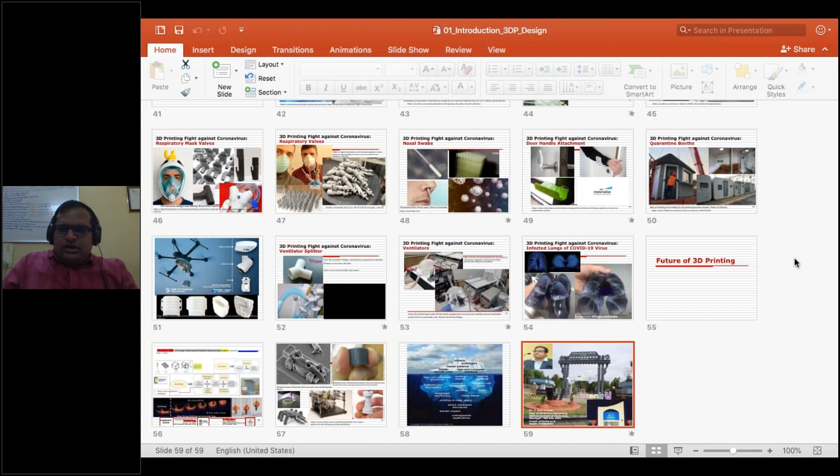Yes, if anyone is having questions, please. One by one. Hello, are you audible? Good afternoon, sir.

I'm Shreyas, calling from Government College of Engineering, Amravati. Sir, I wanted to ask if by chance I have any chance of using or experimenting at NIT Warangal using the lab. Yes, sure, definitely. Actually, because of the lockdown right now, afterwards, yes, definitely, anytime.

Recently only we have installed this, just before the lockdown period, so we are working it out. You be in touch with me, then I will send you the quotation and what can be the charges. Yes, definitely we are ready to help you out. Okay sir, thank you.

Hello sir, yes, Rajesh. Actually my doubt was like the products will be produced in mass, like for mass production. Mass production? Can you elaborate? Let us assume that 10 products are produced.